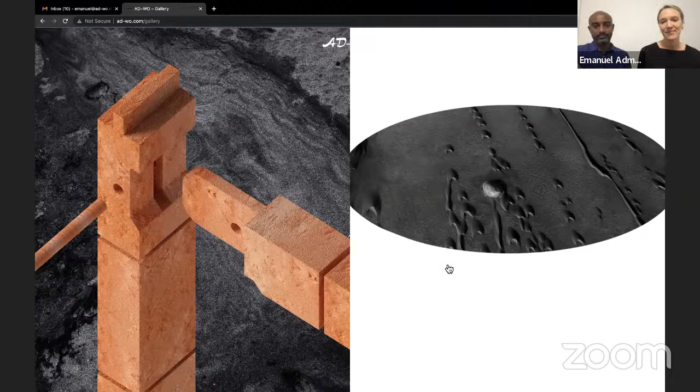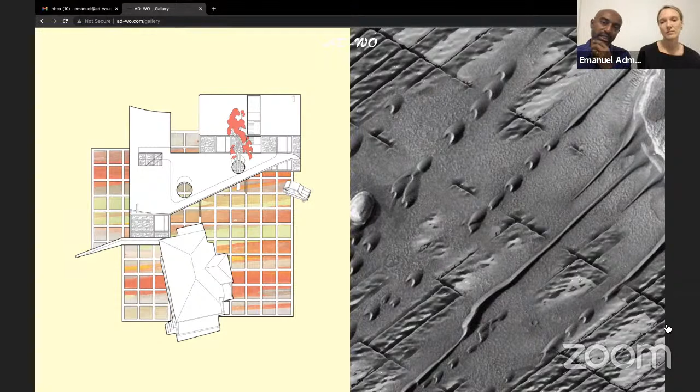On the left is a pair of homes we designed for siblings returning to Addis Ababa to build a house next to their father's compound. We came up with a simple landscape strategy uniting the different architectural elements. On the right is a series of studies thinking about the unitization of land and the measurability of land as it relates to race, again playing with black sand to dissolve these boundaries. So the right is measurability, and the left is a house in Addis.

Did you want to jump in?

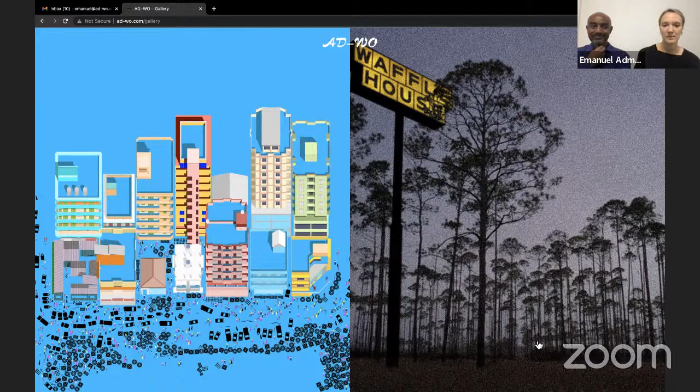The image on the left is a project that we did.

Sorry, I'm interrupting. Please. First of all, I got a text from Stuart that says he hates me. So Stuart, I apologize publicly. Second of all, what is the black cone made of? Is a question we have in the chat.

Which black cone? The one at the measurability project. The black cone is actually made from fiberglass, and it has steel conical legs, ribs also. It has steel ribs on the inside. The top is actually black glass, and on top of the glass is loose shifting sand that is moved around by magnetized robots underneath the glass, and then the scene is made from 3D printed nylon that has each been painted with glue and black sand.

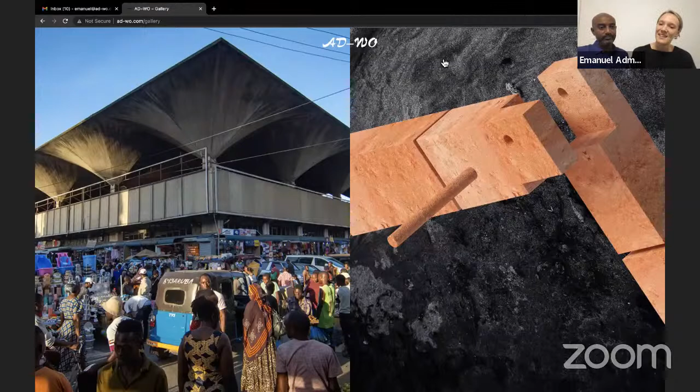And on the right is the table that we mentioned earlier. On the right is another translation of a New England timber construction detail, which is a half-lapped rafter joint, again in brick. And the image on the left is also an image of translation.

This is the Kariakoo Market Hall designed by Beda Amuli. He was referencing in the past, in pre-colonial Tanzania, markets were held underneath massive palm trees. So the building you see here is actually a series of very large concrete funnels meant to speak to this idea of being under a huge canopy. They're also water collectors.

They collect water and passively cool the space underneath. We're really obsessed with this building because it marks a moment of post-colonial optimism on the continent. The architect designed this project to align with a political philosophy called Ujamaa, meaning familyhood, which came out of this brief moment post-liberation when people were optimistic about regaining control of their nation state. It's still the heart of the market today.

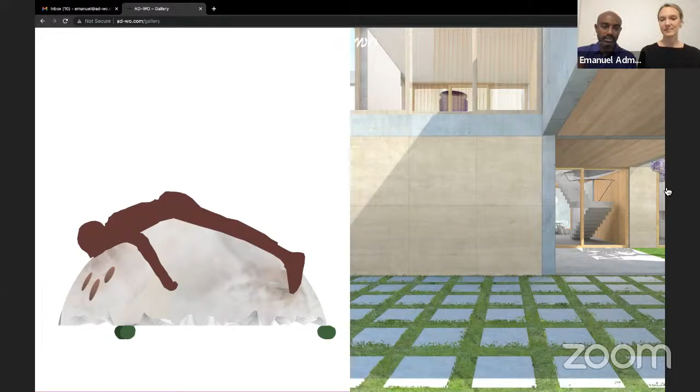Someone is asking in the chat for the name of the market building, the post-colonial optimism one—it's the Kariakoo Market Hall, by the architect Beda Amuli. It's a beautiful building. It was severely damaged about a year ago by fires, but I think they're restoring it.

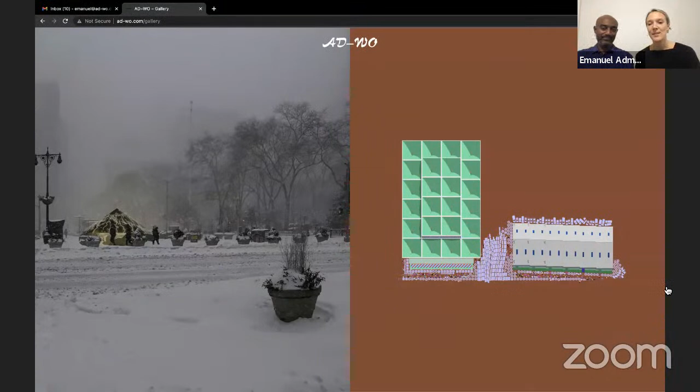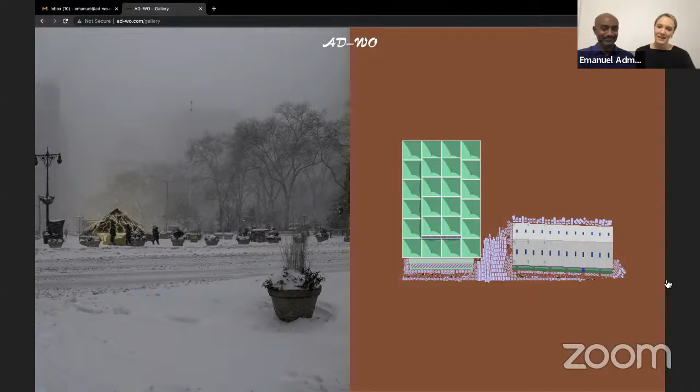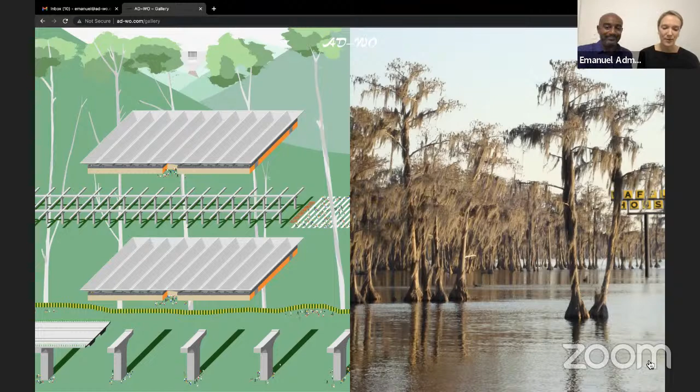I have a question. Oh, mm-hmm. I just missed it before you guys. Oh sorry, we got to pause a bit. Yeah, it's okay, I was trying not to be rude and just talk over. Be rude, please, we have a toddler, we're totally used to it.

I have a question about the representation of your project. In some of the projects there are very vibrant colors in the fills and with the characters as well. And in some of the other projects it's much more shadowy, saturated, like with the sand. So I'm wondering if as you're working through a project it takes on a certain sensibility as you go, or if certain modes of drawing or modeling take on different ways of representing things based on their mediums?

I would say it's the first, in that both of those, to a certain extent, are research projects. And as we develop the research, the project really begins to gain its own ambiance, and that ends up determining the decisions we make in representation.

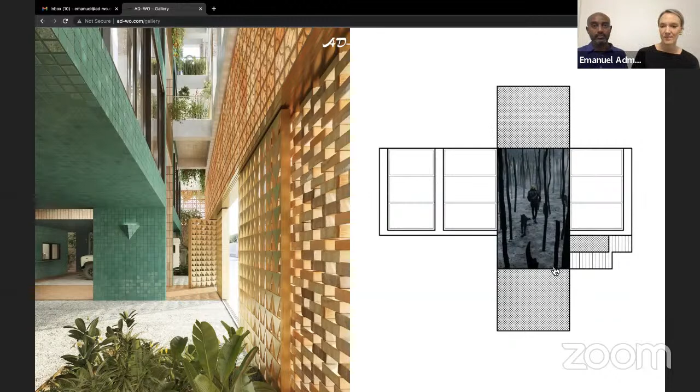Here, you can skip we might skip this one. And this is that building on the left. So you can see in the foreground and a little bit in the background, a kind of a typical street scene, a really high, often rendered concrete block fence with a lush garden behind it.

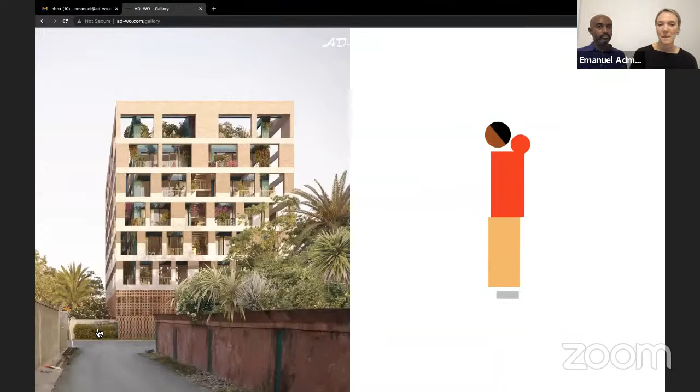Should we stop here? Has it been 30 minutes? We can stop here and scroll through with you guys asking questions. Prefer. Sounds great, thank you so much. I'm sure there are questions from people too hesitant to jump in. So now, by all means, it's your chance.

Can you type the name of the market? I will do that, Jeff. Yeah, I wrote it down, so I will do that.

Maybe I'll ask a question myself. I was thinking back on the tennis match and the pairing, the doubles, and now we have the doubles here also, and this kind of pairing duality. But I'm wondering, in a practical way, how you set the terms of what you include in the pool of images that you're drawing from here. And then also, maybe just a little bit more about why this pairing, other than setting up a nice format for an impromptu casual lecture.

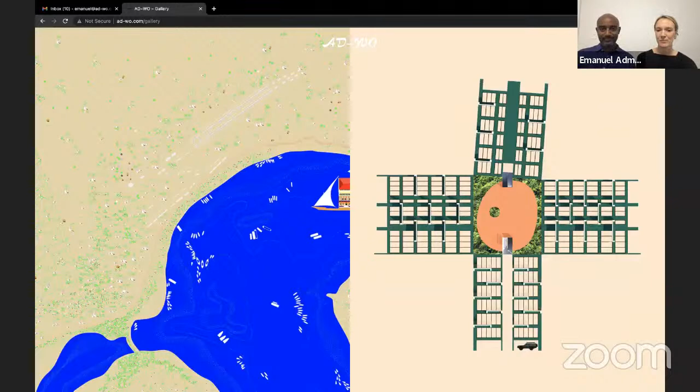Just one other question so far in the chat: how do you approach material choices in your practice? Do you do many material research studies? I know you mentioned the one with the different soil and stuff, or the glass.

Yeah, how do we start? It always depends on the context, obviously. For example, that apartment building currently under construction in Addis Ababa, we were really interested in the single family villas that are currently being demolished. So we wanted to be able to use the brick from those homes for the facade. That was kind of a driving concept from the beginning. But there have been other projects where a particular aesthetic interest ends up driving the material decision. Somehow it's a negotiation between what is available locally and what we're trying to achieve aesthetically with the project.

So it's kind of three different things. One is sometimes a direct reference from site, like the brick building. One is finding an apt, metaphorical material to describe a concept that we're working through. And then a third would be a material as a counterpoint to what we're trying to say, like an inversion of ideas that we're working on—for example, the transformation of wood details into brick.

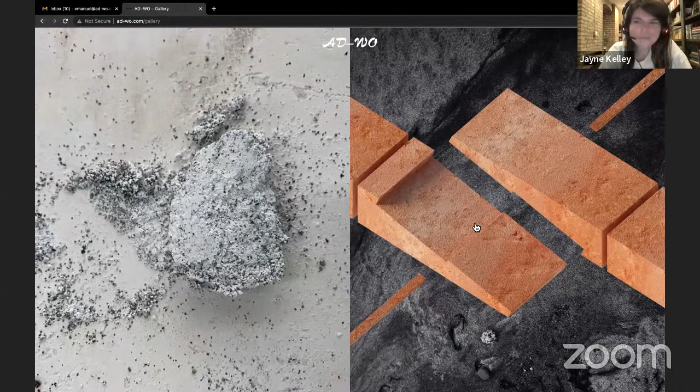This image on the right is a large installation that we're developing somewhere in upstate New York. We've been really interested in tapestry, so we've been trying to find ways to reproduce tapestries, either through particular facade expressions, which you saw with the Bole Rwanda project. But in this case, we're trying to collaborate with stonemasons to actually develop a drawing on the ground. This is a project that we hope will be completed this year.

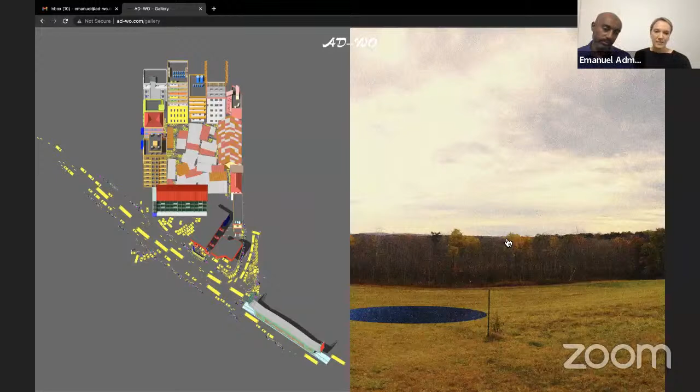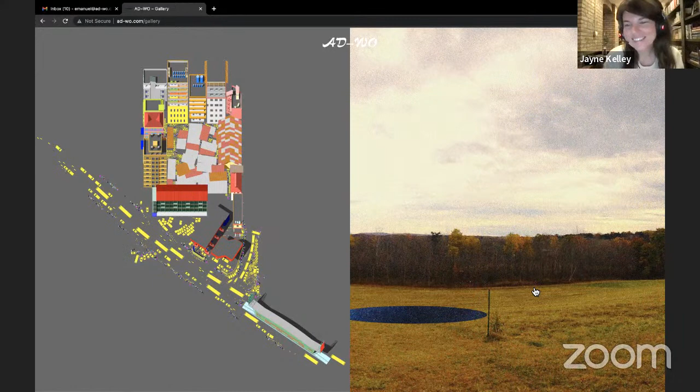Oh yeah, on the right is the undercroft of the Flatiron project.

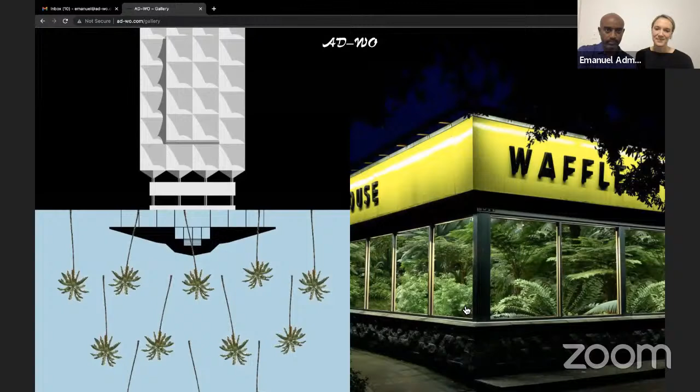And here on the right is probably one of the first images that we produced for Immeasurability, where we were really thinking about the unitization of land, as Jen mentioned earlier, and how particular spatial practices begin to dissolve those units. This became a reference image as we continued to produce both the models, the tapestry, and the collages.

Here's another question: noticing the sizable difference in scale of the projects, do you generally approach a large project with the same mindset as a smaller scale project?

It feels like with larger projects, there are more stakeholders, so having more voices at the start of the project ultimately makes it very different. Whereas with these smaller projects, artifacts for exhibitions, they are generally us running wild with an idea, without much exterior influence outside of our own research and looking for precedents.

Sometimes for us, the scale of the project is also determined by how much time we spent doing it. The marketplace research is probably the longest running project in our practice, and we've been working on that for close to 10 years now. That has created a series of collaborations with folks in both cities, and that's something that is still evolving.

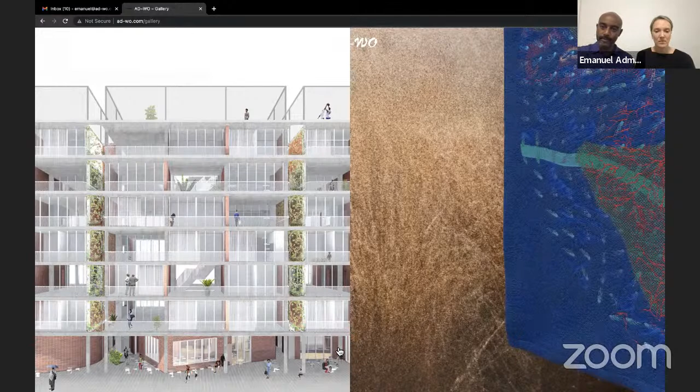Could I just jump in here and ask something? Or maybe offer an observation? Thank you so much. Really beautiful presentation. What struck me is...

For example, in the market project and then in some of the photography, the work's really operating in the realm of documentation, or documentary representation, let's say. But it seems like you're approaching the documentary from totally different directions. So for example, in the market documentation, which I did see at RISD and thought was just incredibly beautiful, exquisite exhibition, it seems to me the documentation, the drawings are about making the real more vivid and more abstract, in the sense that the drawings are incredibly precise and rigorous and detailed.

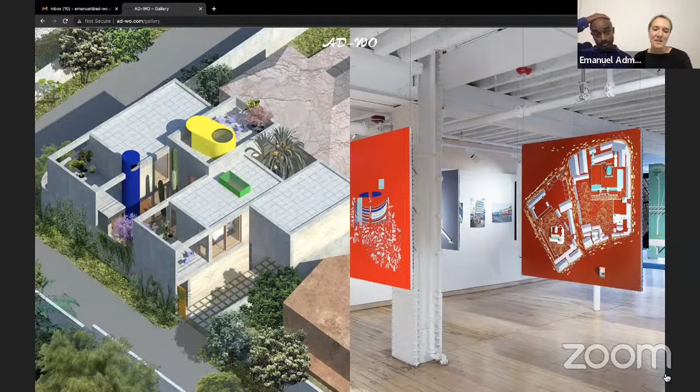I think with the drawings in Two Markets, it was our first attempt to draw a site or space or building from multiple vantage points, and I think it was maybe successful to a pretty limited degree. An essay that was really important to us was Writing With, by Anooradha Siddiqi. The essay is fantastic, but there's a really pertinent concept in there for us about how we can think about architecture from multiple vantage points, and how do we destabilize the authority of the singular vantage point, because that in itself is a fiction as well. I think that's an impossible task we've been trying to develop as we've taken upon these new projects.

Just to add to that, there's the ethical implications of us being positioned here in New York City, for example, and then going and documenting Dar es Salaam or Addis Ababa. So a lot of Two Markets was really grappling with that positionality.

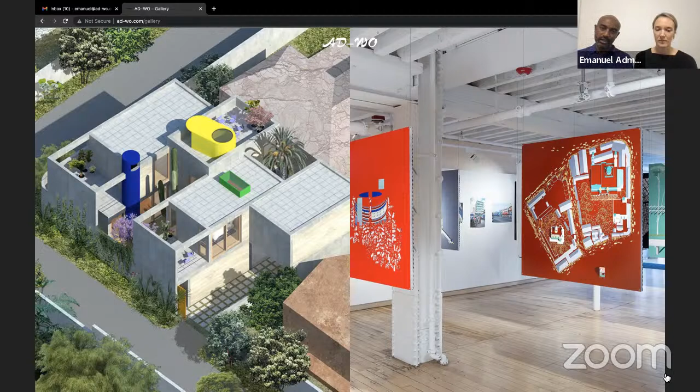And with Immeasurability, it was kind of our own frustration with architecture, really, and in that case, of course, it was about Blackness in architecture. So all the spaces occupied by Black people in the city that are devalued, unaccounted for. As we engaged especially with popular culture coming out of Atlanta, it was clear that people were producing images that were somewhat surreal as a reaction against the banality of the suburb, and that's how we started producing those images of the woods, for example, with the Waffle House sign. Those became experiments of what are the cultural signifiers that take a normative everyday environment and make it an environment that is supposed to signify Blackness. In Atlanta, Waffle House is associated with Black culture because it's assumed that's the place you go after the nightclub. We wanted to make these types of oblique suggestions without necessarily being explicit.

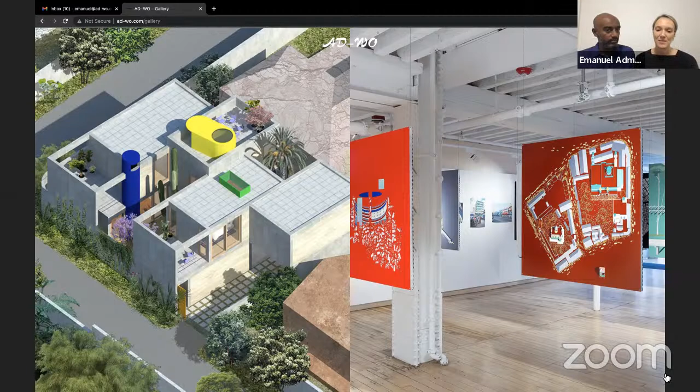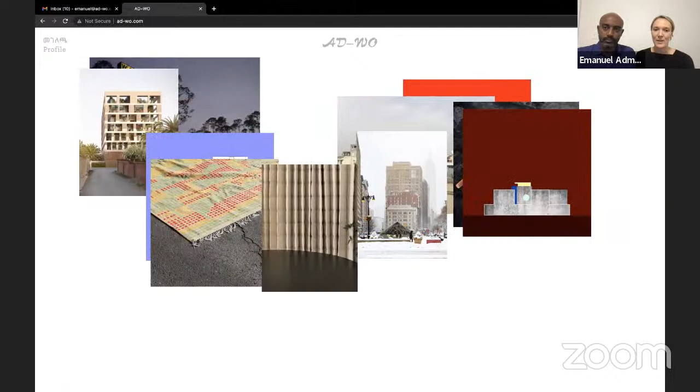We touched upon this before, that these are strategies meant to be in conversation with modes of representation that have come before us. Like if you look at music videos by Outkast, for example, there are plenty of examples, the TV show Atlanta by Donald Glover, plenty of examples of how weird the suburbs can be, and beautiful cultural artifacts, like the music and movies that come out of that often marginalized space.

You can also email us. We'll have to extend the conversation over email. Well, thank you so much, Jen and Emanuel. This was great, it's really nice to enter this constantly shuffling stream of your thoughts. Definitely destabilizing in very good ways.

Penelope says, wonderful presentation and conversation. Thank you, I second that. Thank you so much, we're so grateful. And you're gonna have to come to Chicago. Now that we have you on the hook, we'll have to have you in Chicago soon. Thank you so much, thank you for having us. Yeah, thank you, bye everyone.